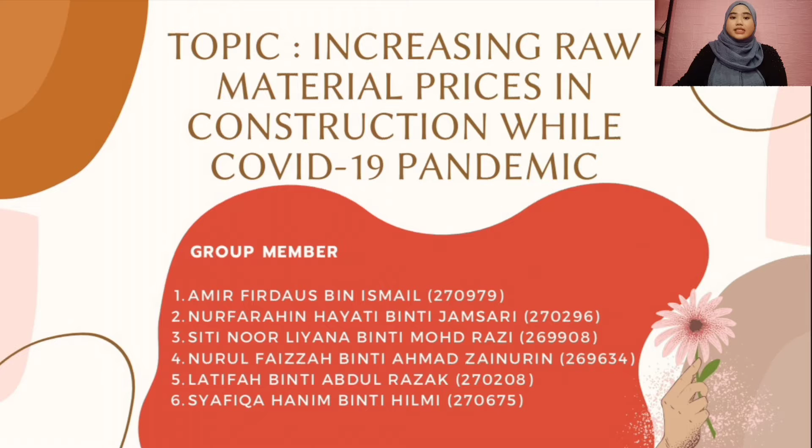Okay, let's start with the abstract. The COVID-19 pandemic has caused the biggest worldwide well-being emergency in decades, apart from the phenomenal number of admissions and hospitalizations. The pandemic has resulted in financial slowdowns, broad trade disturbance, and critical hardships.

This study focuses on exploring the increasing raw materials price in construction during the COVID-19 pandemic, where producers confront cascading challenges through the supply chains. The goals were accomplished through quantitative strategies, from web research and survey, to test the hypothesis that increasing raw material price in construction is linked to the pandemic. An internet study was disseminated to 30 students taking construction and engineering minors.

Information was collected by a substantial and solid survey comprising 3 sections. The first section is demographic, and 2 sections concern components such as factors increasing raw material prices and the effect of increasing raw material prices.

The discoveries showed that COVID-19 is increasing raw material price in construction, and producers confront cascading challenges through the supply chains. Our investigation showed a solid relationship between health factors causing difficulty in finding raw materials in construction, and contractors having difficulty when offering a construction project.

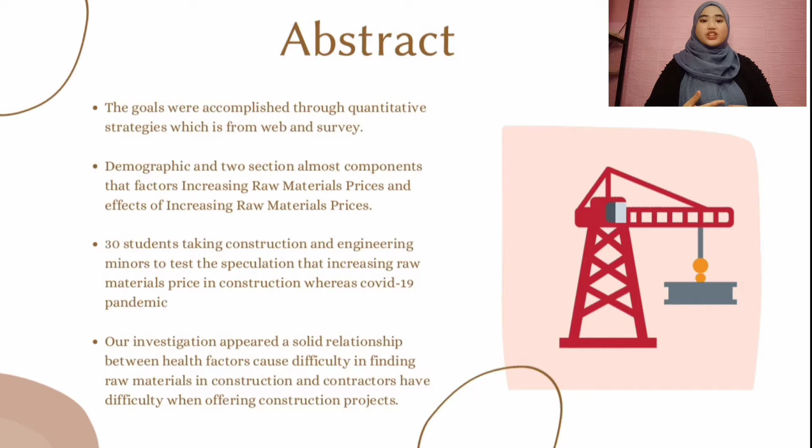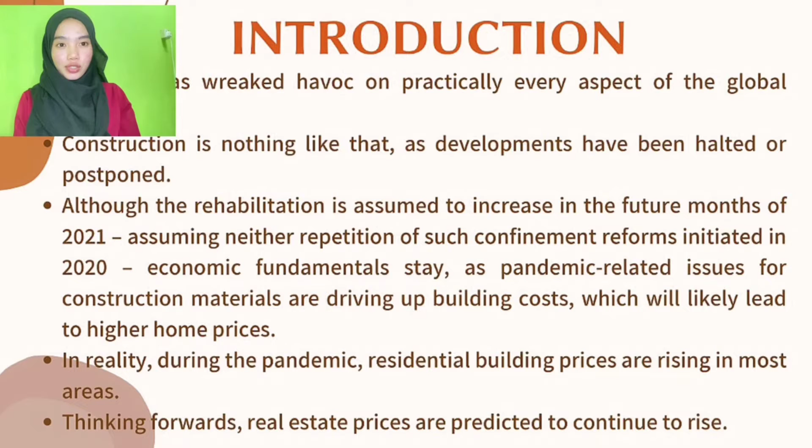COVID-19 has wreaked havoc on practically every aspect of the global economy. Construction is no different, as developments have been halted or postponed due to new standard operating procedures such as social distancing and safe work procedures, including effects on production and personnel supply. Those allowed to operate are likely to incur cost overruns.

The Global Construction Activity Index of the Royal Institution of Chartered Surveyors, a guide of present and predicted construction economic conditions among construction workers, revealed a gloomy picture among geographies. Overall, mood has improved significantly through the prior seasons.

Construction sectors in certain nations have been well placed to rebound because governments have chosen to invest in infrastructure as part of recovery efforts, to generate jobs, improve the economy, and hasten the transformation to efficiency.

Although rehabilitation is assumed to increase in the future months of 2021, assuming no repetition of such confinement reforms initiated in 2020, economic fundamentals stay as pandemic-related issues for construction materials are driving up building costs, which will likely lead to higher home prices.

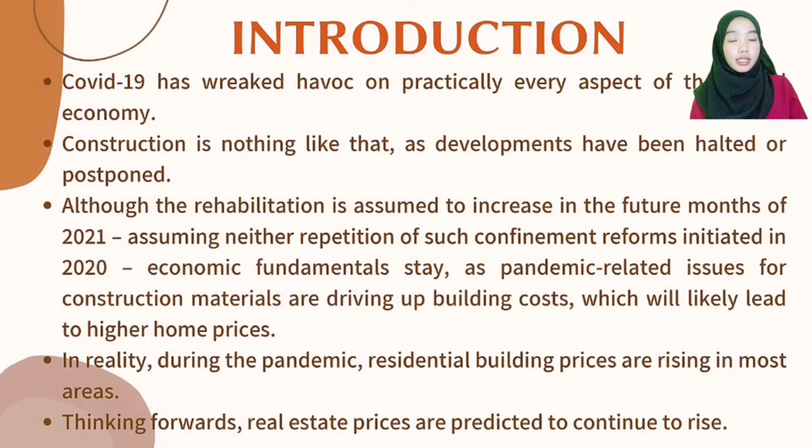The research methodology was conducted qualitatively through observation and research obtained from the internet. As a result of the observation made, it was found there is a rising price of building material in the construction industry during the COVID-19 outbreak, which caused problems to the parties involved, namely contractor, customer, and consultant.

The increase in the price of building material caused increased building costs to construct a building, and caused plans to be disrupted due to lack of budget.

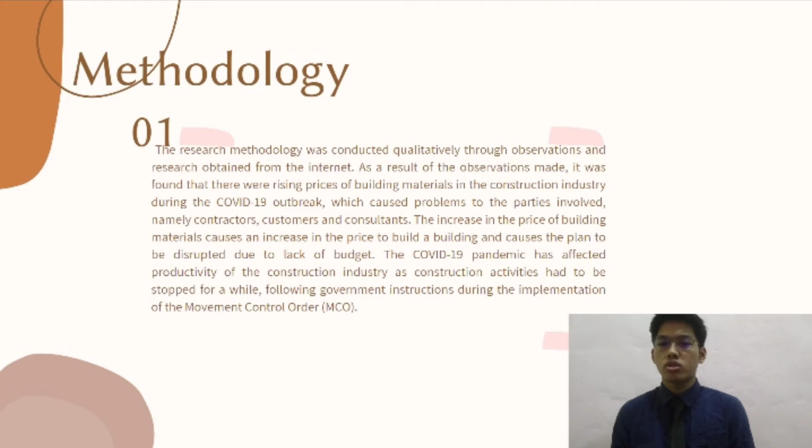The COVID-19 pandemic had affected productivity of the construction industry, as construction activity had to be stopped for a while following government instruction during the implementation of the movement control order, or MCO.

Most research used qualitative methods to facilitate data collection through surveys and internet research. Survey information among employees was taken from a Google form created and given to workers involved in the construction industry, in connection with the increase in the price of building material due to COVID-19.

This observation looked at collection of data through interviews conducted in public in Malaysia. There are some questions done by our group, which are divided into three categories.

The first is a question related to the factors behind the increase in the price of construction raw material. The second is the impact of rising building material price on the construction industry. Third is suggestions to deal with the rising price of building material during the COVID-19 pandemic.

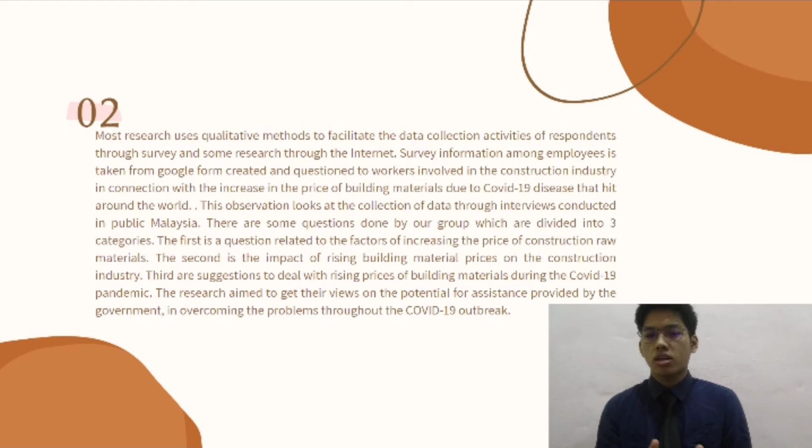The research aimed to get their view on the potential for assistance provided by the government in overcoming the problem through the COVID-19 outbreak. Okay, I will continue with the main factor that caused the increase in the price of the raw materials in construction.

During the COVID-19 pandemic, the main factor is health factors causing difficulty in finding raw materials in construction. This is because we all know that the COVID-19 virus is a highly contagious disease.

This is much related to health problems, especially during the construction process. For example, when one of the workers selling this material is infected with COVID-19, the result is the entire shop that sells the raw material will be closed, and the workers who have done business with it will be quarantined, costing the entire construction.

When many shops selling raw materials are closed, it will be difficult for workers to find raw materials. Some building materials can be ordered online, but it takes time to reach the construction sites. This becomes a problem, especially when construction needs to be completed soon, so they have to find another supplier even though the price is high.

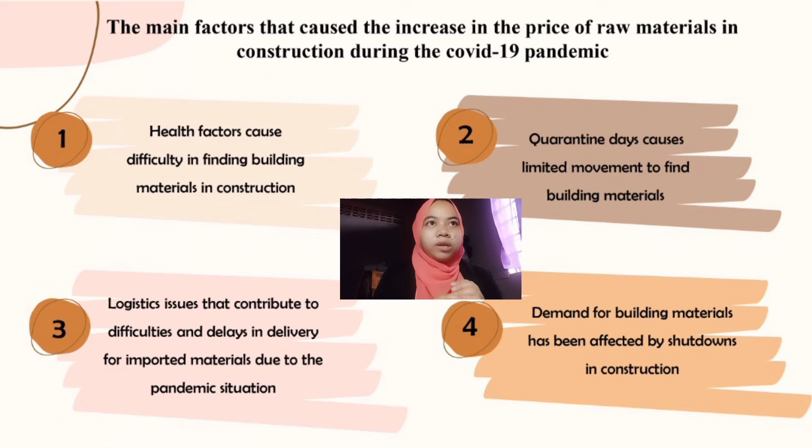For example, when raw materials take a long time to arrive at the construction site, the construction process will be slow, making it difficult for workers to proceed with the project. Not only that, the raw materials will also experience an increase in price due to high demand, and shipping prices are also likely to rise sharply.

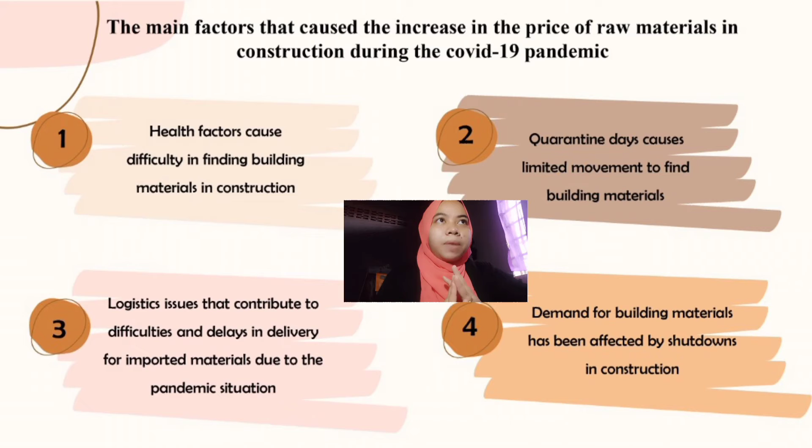The fourth factor is demand for building materials being affected by shutdowns in construction. Demand for building materials has been affected by closures in construction, because many unimportant projects have had to be postponed. However, demand can only increase with reconstruction.

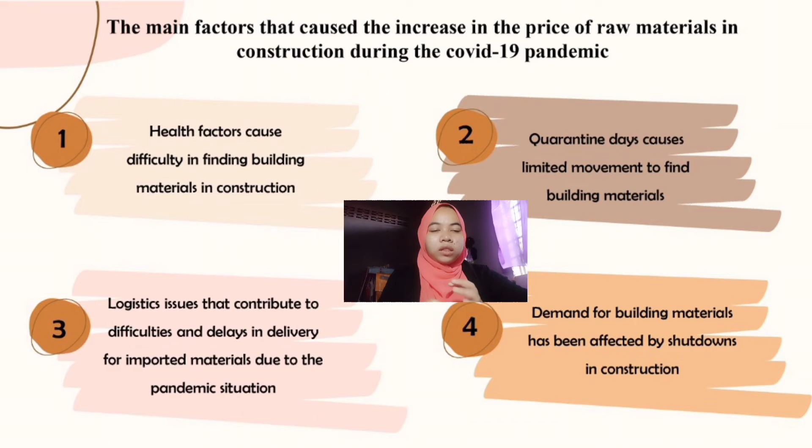When there is a disruption in the supply of raw materials, the price of raw materials will increase significantly. The first impact is the quality of the project is affected. This is because it is very likely that employees will use low quality products because the price is much cheaper. Sometimes they only buy raw materials according to the given budget. Things like this will cause the quality of the project to be bad, such as cracking in the house, the roof leaking easily, and the walls starting to crack.

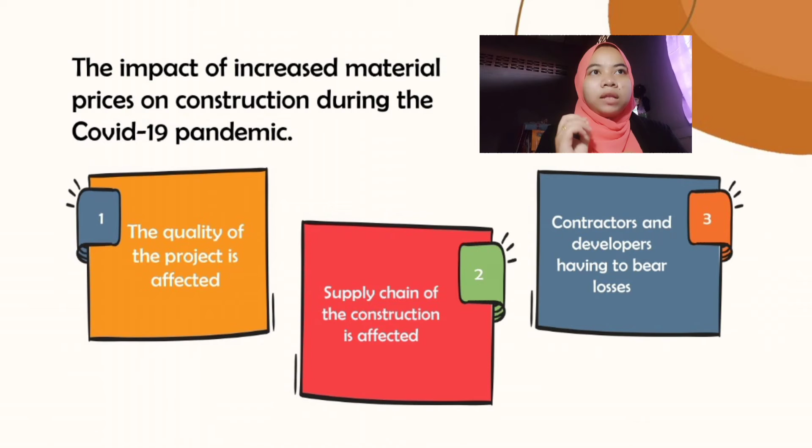Okay, I will continue with this part. The second impact is the supply chain of construction is affected. According to a report by the Construction Industry Development Board of Malaysia (CIDB), the price of construction materials was stable in 2020. However, the upward trend in the price of iron and some metallic materials is seen to be increasing by 2021. This will indirectly affect the construction industry in Malaysia due to the rising prices of iron, cement and other basic construction materials, impacting other materials including sand and bricks.

Prices that have been put into construction contracts cannot cover market price volatility and additional works due to the COVID-19 pandemic. Although the contractor has contingency funds, it cannot afford losses during this pandemic. This affects the supply chain of the construction industry due to late payment by contractors and also late payment from the developer.

The last impact is contractors and developers having to bear losses. Rising prices of building materials affect contractors and developers, causing huge losses. The tender cost is the price agreed by the contractor and the client and cannot be changed. However, the price of building materials undergoes significant changes during the project. This results in the contractor incurring huge losses because they have to buy building materials at a high price, not as promised in the contract.

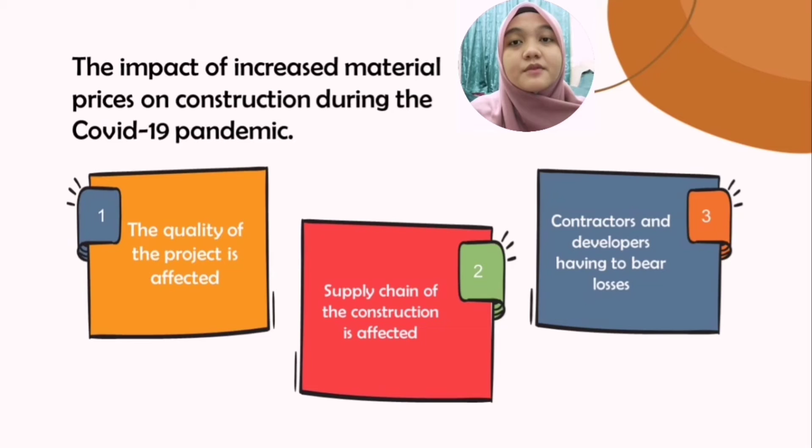The Construction Industry Development Board (CIDB) has also suggested a price change clause VOP be allocated to projects involving government construction, especially during the Movement Control Order (MCO). According to the Chief Executive of CIDB Malaysia, granting this VOP is expected to reduce the financial pressure and burden on contractors affected by rising building material prices, and ensure ongoing projects can be completed on schedule.

The second suggestion is a protection clause for the price of building materials included in the contract during tender. Incorporating a building material price protection clause into the contract when a contractor tenders a project is one strategy to deal with rising building material prices, ensuring contractors do not suffer losses.

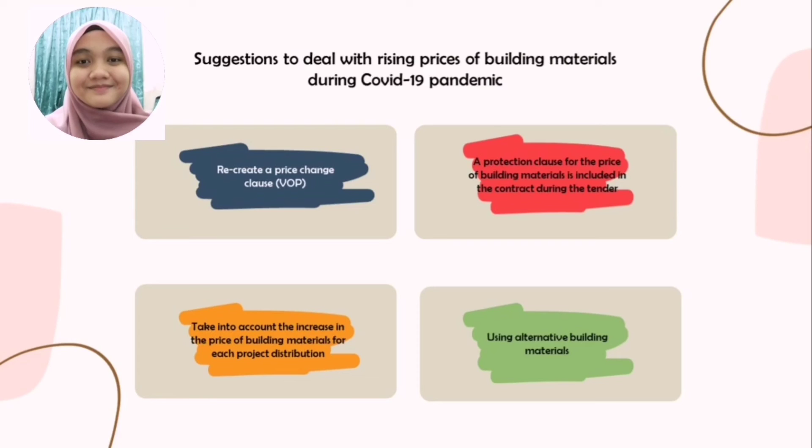Based on the case study results, there were many effects on construction during the COVID-19 pandemic. Among the effects is that ongoing construction had to be postponed due to the MCO, which takes a long time to complete a building. As a result, 17,000 businesses will be impacted, and these businesses constitute the backbone of the Malaysian construction industry.

According to CIDB figures from 2018, they account for the majority of personnel and labor workforce in the Malaysian construction sector, totaling 815,000 workers. Some international workers may elect to return to their home country following the MCO.

Even though all classes of contractors are now permitted to resume building activity on site subject to approval, the harm has already been done. In the face of onerous health and safety standards, fears and anxiety about infection, ambiguity, and a fall in foreign workers' morale, their production will be significantly interrupted.

Furthermore, there is a chance that supply chain interruptions, such as those affecting key building material suppliers, equipment rentals, and imported goods, may be impossible to resolve in the short run. These features and circumstances alone demonstrate that the Malaysian building industry requires more than simply government support.